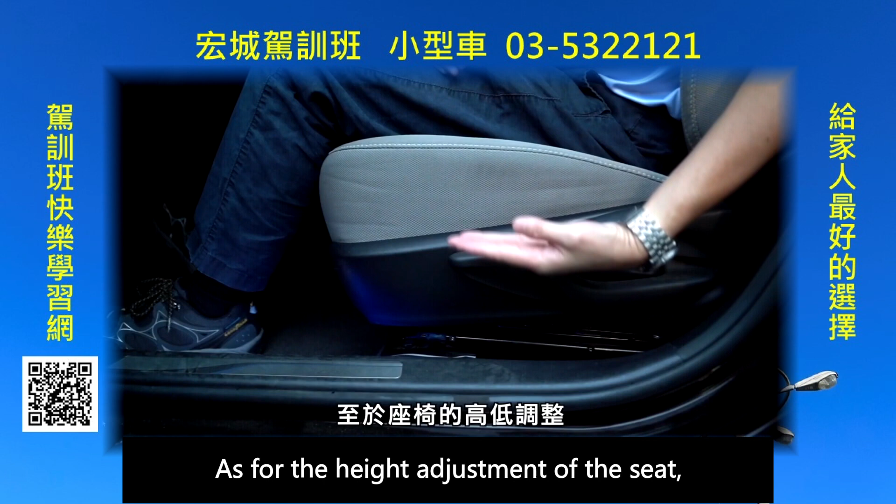When the driver's seat is too close and the airbag inflates, it can cause serious injuries. It is recommended to sit at least 25 centimeters away from the airbag. The distance is measured from the center of the steering wheel to your sternum. Additionally, the closer the headrest is, the better head protection you will have. Therefore, it's not advisable to use a cushion on the seat back.

Teacher, I would like to ask how to adjust the rearview mirror. Not adjusting the rearview mirror before driving will prevent a complete understanding of the vehicles on both sides and behind. When turning or changing lanes, it can easily lead to misjudgments regarding the presence of other vehicles, causing traffic accidents. Furthermore, the cleanliness of the mirrors should also be noted. The interior rearview mirror should primarily provide a view directly behind. It is recommended that in adjusting the side rearview mirrors, 1/5 of the inner circular part of the mirror should show your vehicle. The remaining part should show what is behind the vehicle and the status on the side of the vehicle.

Teacher, I have one last question. How should the steering wheel be adjusted? If the steering wheel is not properly adjusted, it will affect our steering maneuverability and can create ergonomically incorrect movements, leading to hand, back, and shoulder soreness. This is not good for long-distance driving. When adjusting the steering wheel, the manual adjustment lever is mostly located under the steering column. If the vehicle's steering wheel supports height adjustment, after adjusting the height, try turning the steering wheel. While turning, the principle is to keep your hands from touching your thighs. Also pay attention to the information on the dashboard and make sure the steering wheel does not obstruct it. Is everything clear? I understand. Thank you for the detailed answer, teacher. If you want to know more about traffic safety information, please visit the traffic safety website.

After watching the video, let's move on to our course: understanding vehicle structure, driver's cabin, and dashboard.

Each type of vehicle's dashboard is generally similar. However, the more warning lights there are on the dashboard, the more testing systems it will have. The color distinctions generally include blue, green, yellow, and then red. Generally speaking, the red part means you need to address it immediately. The yellow part can usually wait to be addressed. Green indicates normal; you probably don't need to deal with it right away. There are about these colors.

Let's take a look. The remote control part is the remote control on your body. As long as you get close to the car door, that door handle can open the car door. Its design is the door handle. It has a sensor, it can detect you. If the remote is on you, the car door can be opened, and if you touch it again, it will close the car door. You can also use the button.

There are buttons on the remote, and it has a key on it. Why is there a key? Because it's worried the remote might be out of battery. You can use this key to open the car door.

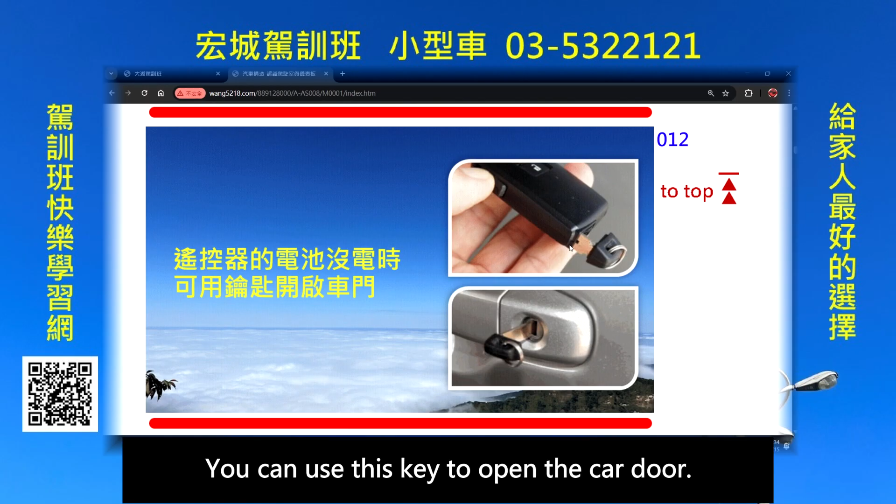But if your remote is completely out of battery, you still can't start the vehicle. You just need to change the battery. According to the coach's experience with this car, it's a new car, so after about 4 years the battery will run out. After changing it, the new battery ran out after 2 years.

Just sharing this with everyone. Changing the battery isn't too expensive. The first time I changed it, it was $60. This time it's going to be $80.

The remote battery can drain due to weather factors, and then you can't open the car door. This is a situation I encountered in the mountains. I woke up in the morning and the remote couldn't open the car door, because it was too cold the night before. After the weather warms up, you can open the car door again. This is to let everyone know: in this situation, after you go down the mountain, you should change the battery, because it has already lost a lot of power.

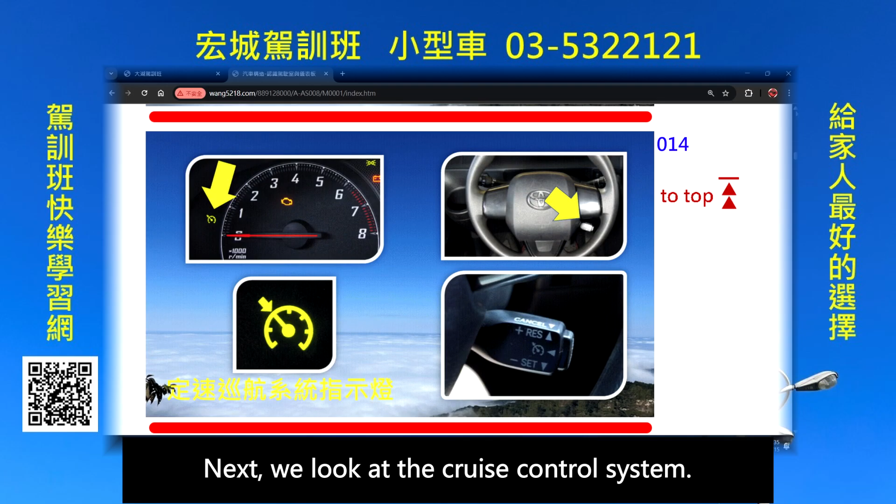Next, let's look at the cruise control system. This car has a cruise control indicator light. Everyone driving on the highway, what do you fear the most? Speeding. Imagine if there is this system - you set it at 100, and it maintains that speed. It won't overspeed, isn't that great?

Generally, they set this system for driving. If there is a situation...

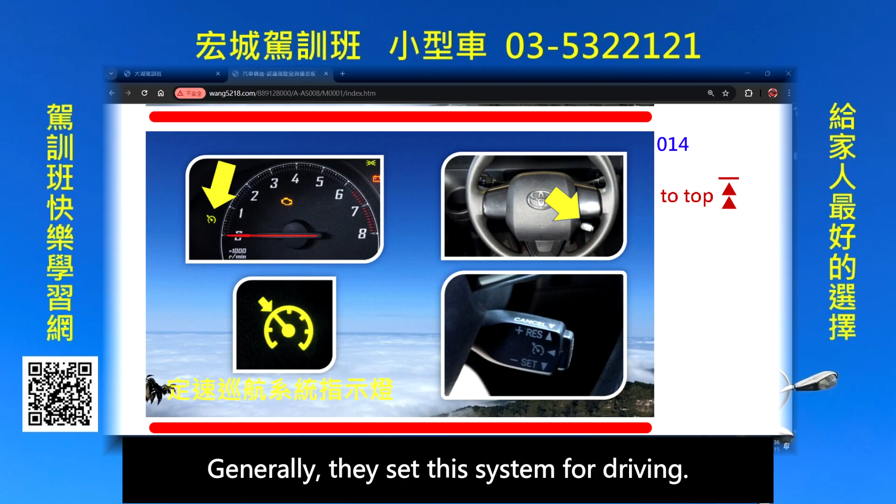There's another question I want to ask you, students. When you set it to maintain a fixed speed, where does your right foot go? Usually it retreats. What happens if the right foot retreats? If something happens and you need to brake, you have to choose between the accelerator and brake - what if you hit the wrong pedal? Does that lead to a crash?

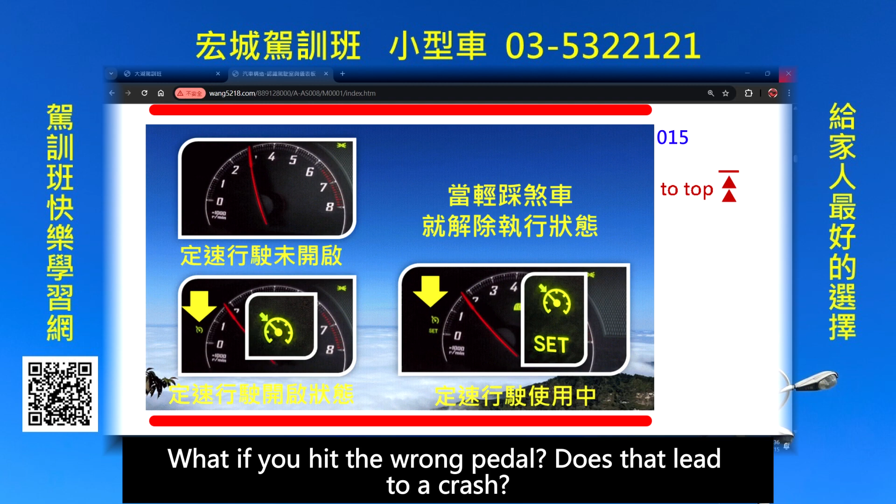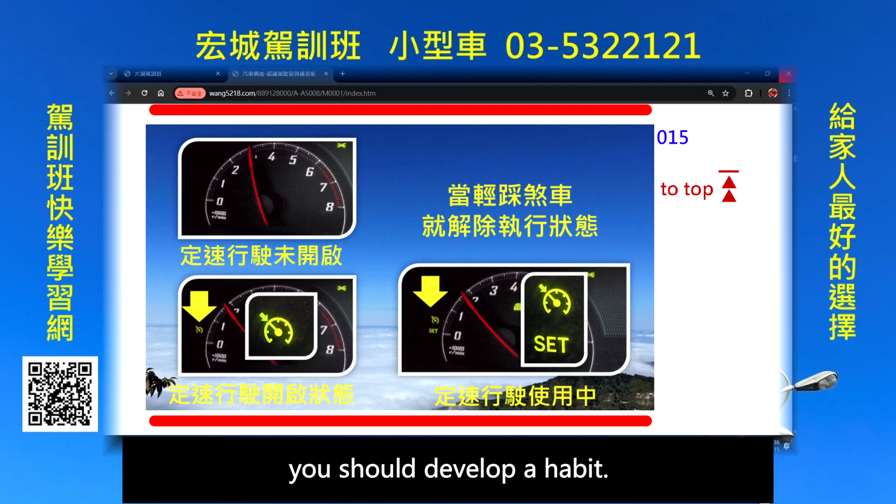So I want to remind all students of something - you should develop a habit. Keep your right foot off the pedal; it should rest on the brake pedal, ready to brake. I'll say it again: when you drive, you should develop a habit. Keep your right foot off the pedal, it should rest on the brake pedal, ready to brake, not pulling back.

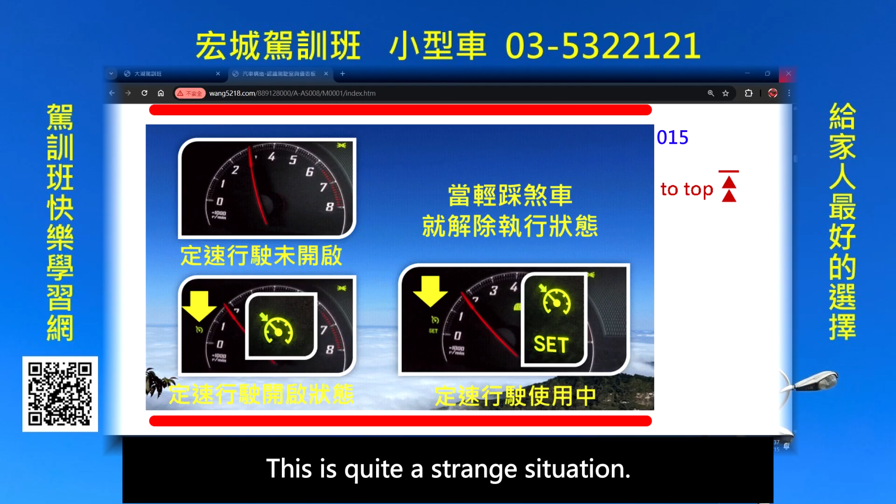Next, new cars all have tire pressure monitors. The tire pressure monitor has been discussed before about tires, let's briefly mention it here as well. When the light comes on, it means one of the 4 tires has insufficient pressure. As previously mentioned, it lights up when it's about 5 psi low.

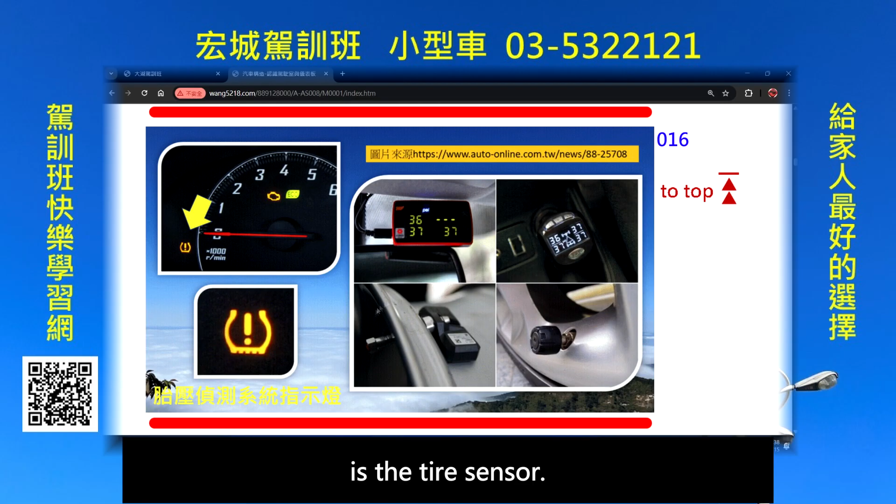Its design typically has 3 types. One type is installed inside the rim, another type is installed on the outside of the rim, and the other is the tire sensor which detects differences in tire rotation speed. The type outside the steel ring is the tire sensor - it senses the difference in tire rotation speeds.

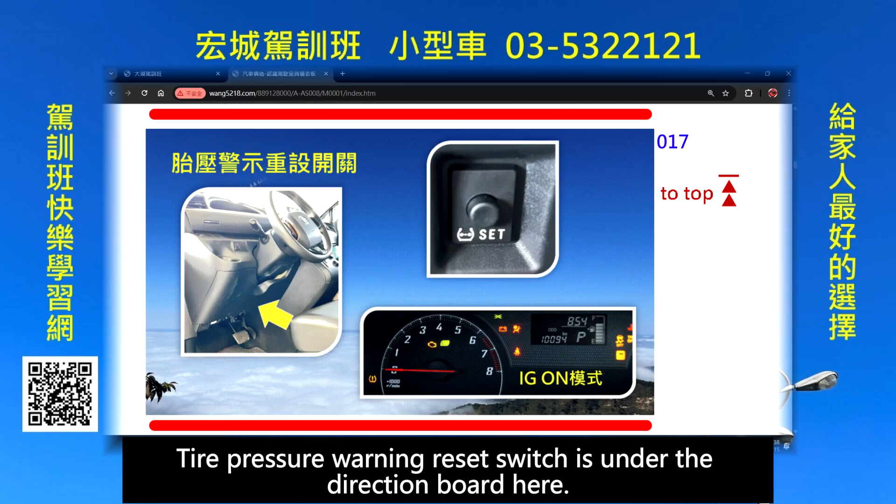He just indicates there's a switch here - the tire pressure warning reset switch is under the direction board here. If we're using the stick, let's not touch it. This is the explanation from the user manual - this part will be handled by the manufacturer, let's not mess with it.

For tire pressure on our car, look at the A pillar and the B pillar. The B pillar has a sticker here, and the sticker will tell you the size of the original manufacturer's tires, and also the tire pressure that needs to be filled - how many pounds. As for the tire pressure gauge, we usually don't have one at home.

Where can you find a tire gauge? At maintenance shops, tire shops, and also gas stations - they have free water and air refill. Where is this? At the gas station in the rest area. It also has a place for you to inflate tires, and also a free water refill place. This is the inflating equipment.

In the future, when you drive in mainland China, what do you do when you find there's no air? To be precise, it's not about finding there's no air - you should regularly check the tire pressure. Maintenance shops, gas stations, and car rental places all have inflating equipment. Or you can buy an electric inflating device for your car. My family bought one a while back, and it's kept in the car.

It's rarely used since it can inflate. It has a warning light and can also serve as a flashlight. It's great, right? But if left unused for a long time, it might break, especially electronic products. So you should learn in advance.

Before you buy something, consider carefully. Is your usage rate high? Not to say don't buy it, it depends on your usage rate.

Let's take a look at the gas station inflating equipment inside the rest area. This is its structure, this is the valve. When we're measuring tire pressure, we just press down on the valve. It will detect the pressure.

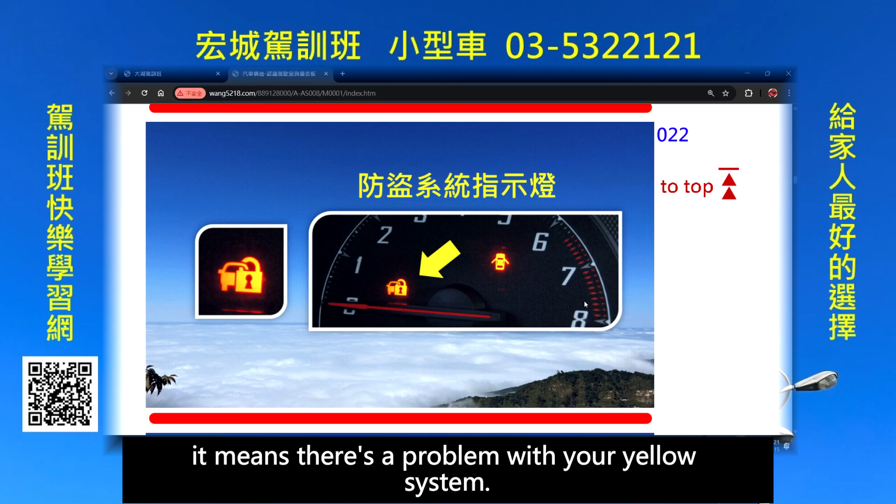Next, let's see if this light is red. The anti-theft system indicator light, when this light is on, it means there's a problem with your anti-theft system. Similarly, you should check it regularly.

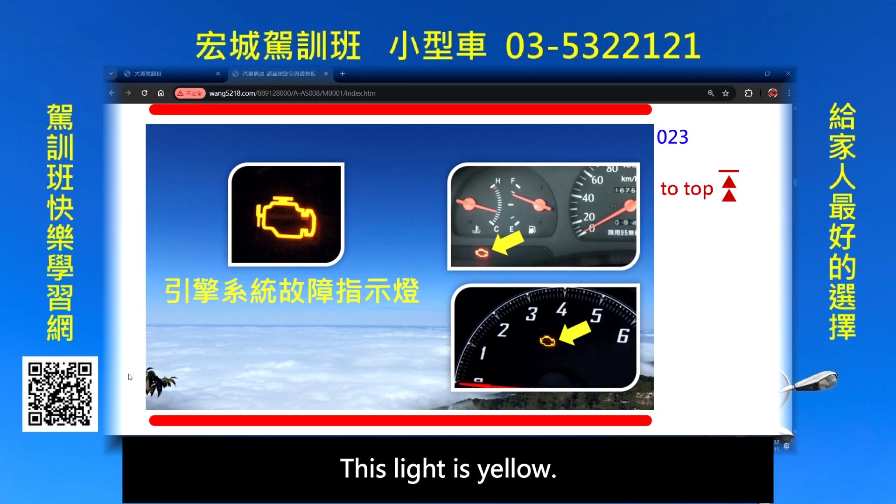Engine system fault indicator light. This light is yellow, it means you don't need to handle it immediately. It's okay to delay, because this needs to be checked with a computer. There might be issues with that system, or it could be a computer malfunction, or other sensors might have problems. All these possibilities, ultimately you still need to go for a computer check to troubleshoot.

When the energy-saving driving indicator light is on, it tells you that you're currently in energy-saving mode. If you slightly press the accelerator, this light will turn off, which indicates that you're in fuel-consuming mode. Not every car manufacturer has this light, it depends on the brand.

Door open indicator light. If this light is on, it usually accompanies a buzzer sound. There will be other sounds telling you that the car door is not closed properly. Therefore, when checking, you need to check each door, including the rear trunk as well.

This is the red light, the small light indicator. If this is on, it means your parking lights are on. If this is on, it means your low beam is on. Then turn it again to the headlights.

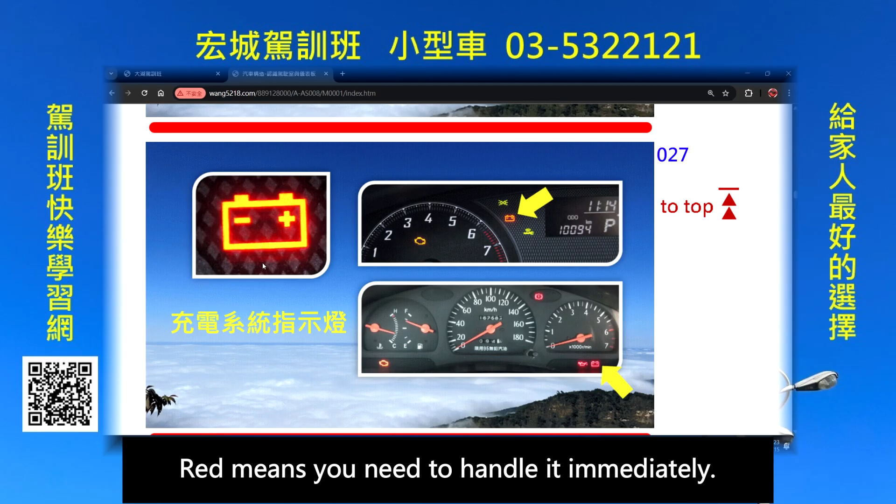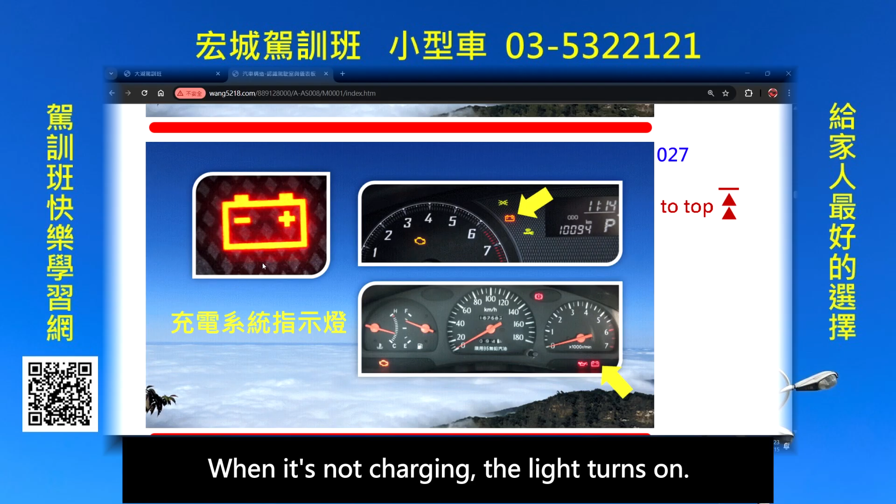Charging indicator light. If this light is on, it's red. Red means you need to handle it immediately, otherwise you'll run out. The charging indicator light means our car has an electric generator, and the generator isn't generating power. When it's not charging, the light turns on, and the car can stall. Because the battery still has some power left, it can supply power for ignition, until it runs out and the battery is empty. Then it's useless.

Airbag protection system and seatbelt pre-tension warning light. After you start the engine, if this light comes on, you need to get it checked. Your airbag system and seatbelt pre-tension system, because there are front airbags and side airbags, must return to the dealer to check the door switch system.

Engine touch start system indicator light. When you start the engine, a green light will appear if it detects your key, and you can smoothly start your engine. If you press the start button and it shows an orange light, that means it hasn't detected your key, or your key's battery is dead. It still won't start, and this orange light will appear.

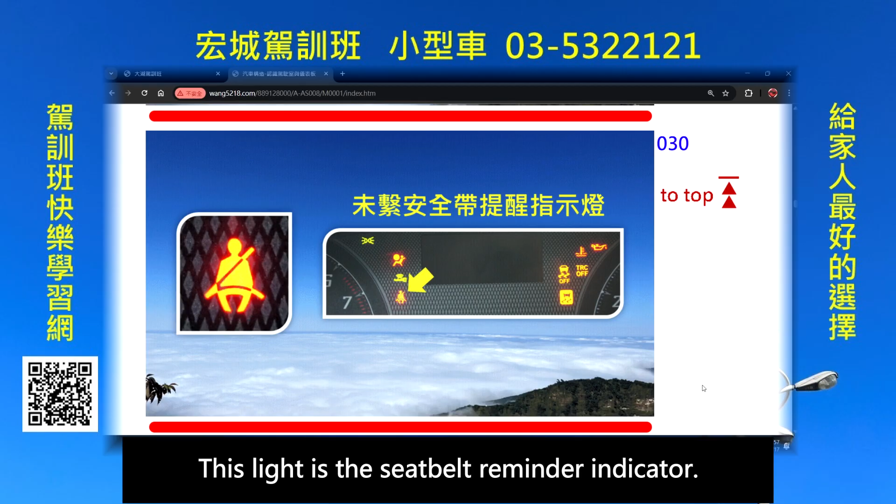This light is the seatbelt reminder indicator. When you haven't buckled your seatbelt, this light is on. Next, it will sound an alarm.

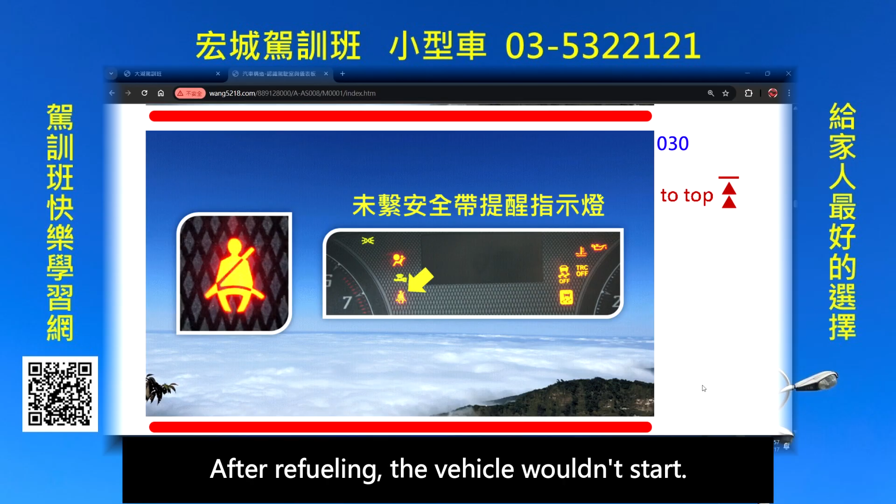I once met a gentleman who drove to a gas station to refuel. After refueling, the vehicle wouldn't start. After several attempts, he found out it was because he hadn't buckled his seatbelt and couldn't start the engine.

High beam is just a light. Our traffic regulations tell us 100 meters ahead, if there are no cars, you can use high beam. But at night, how do you know? It actually isn't too difficult, as long as there are no cars in front, whether they're going the same direction or opposite, no cars, then you can use high beam.

Why use high beam? Because high beam casts a higher angle, you can see further, and seeing further allows you to avoid danger. In the future, when we drive outside, when passing an intersection, also pay attention and switch to low beam. When we are on the road, also pay attention to this, using high beam while driving can blind oncoming vehicles so they can't see the road ahead. So I want to remind everyone to learn and pay attention to the light indicator.

Next, let's look at the low oil pressure warning light. When this light is on, the same applies.

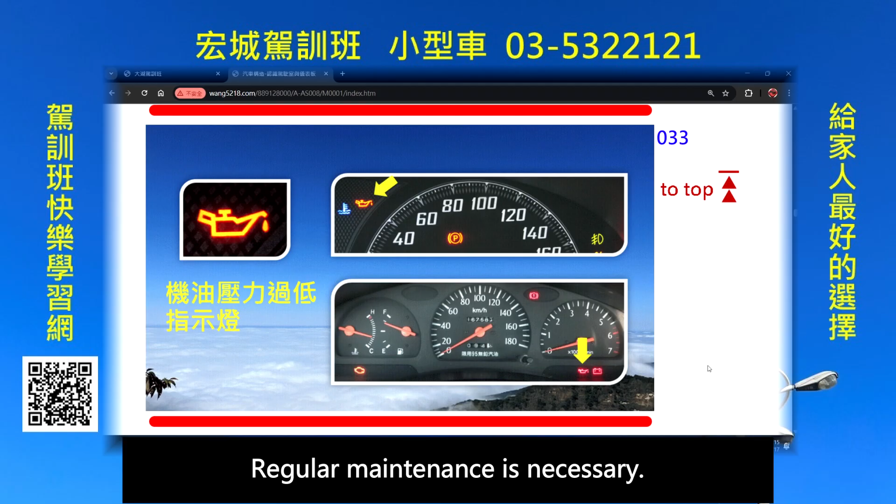Regular maintenance is necessary because if the oil is insufficient, the temperature will rise and parts will wear out. What is warming up the engine, and why do we need to warm it up?

Let's take a look at this news report, preparing to take the beloved car for a stroll.

Many people often just wait after starting, simply standing still. This car looks like an old model, but actually it's a 90s car, about a car from 1989 or earlier. This model has a carburetor, so as I mentioned, it needs warming up.

The key is to see when the water temperature reaches normal temperature. Now it's just warming up, and it will reach the normal temperature level. The condition of the car's fuel lines will be better because it reaches operating temperature. The owner says you must wait for the engine to run smoothly before driving.

allowing the engine's air and fuel to mix. But its fuel supply accuracy can lead to air pollution. Today's car models have long been replaced with computer controls. No need to warm up, partly to avoid pollution. On the other hand, the new car's computer is very smart. It sets everything up for you in real time.

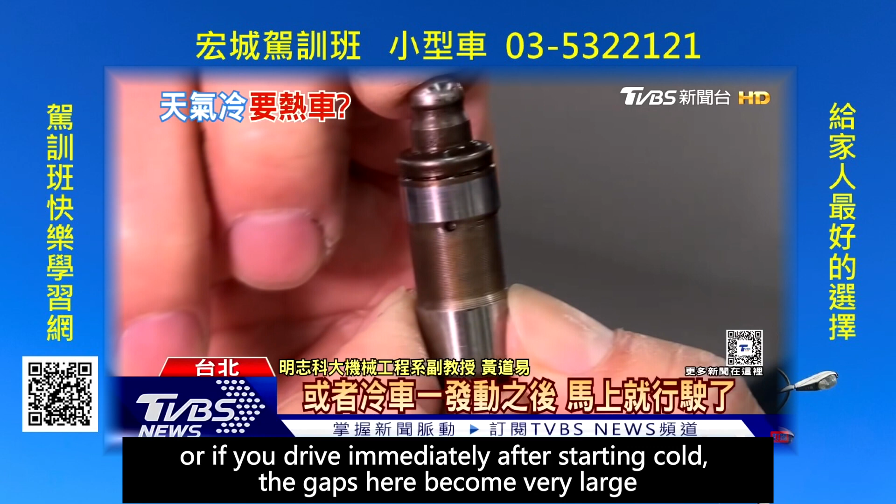The entire operation will produce a much louder sound. So at this time, fuel consumption will be very poor, and it will generate more exhaust emissions.

The car's parts are all metal. Each part will wear out from mutual friction when operating. Over time, it will certainly be prone to failure, especially when the engine is cold. The oil flows back down and relies on the startup to pump back into the engine, so oil truly controls the lifeblood of the car.

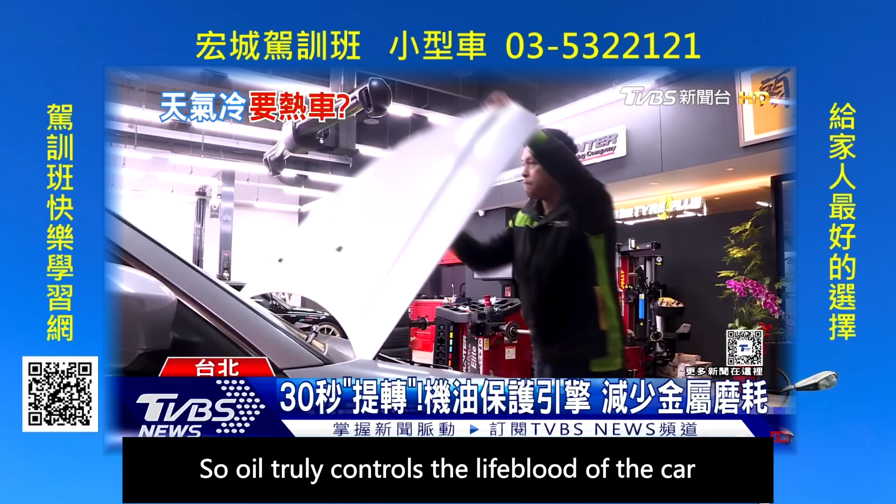If a driver forgets maintenance and only maintains after 20,000 kilometers, the oil is already gone. Actually, you can still drive, but if you want the car to last and keep it longer, maintaining it regularly is essential.

If you maintain your engine well, there are many cases abroad reaching 1 million kilometers, and the engine is still fine. If you're not diligent with maintenance, some people only make it to 70 or 80,000, or over 100,000, and the engine fails. Whether you maintain every 5,000 kilometers, or change the oil at 10,000 kilometers, both are fine. It just depends on the owner, whether you want to do one major repair, or change oil frequently to properly maintain your beloved car.

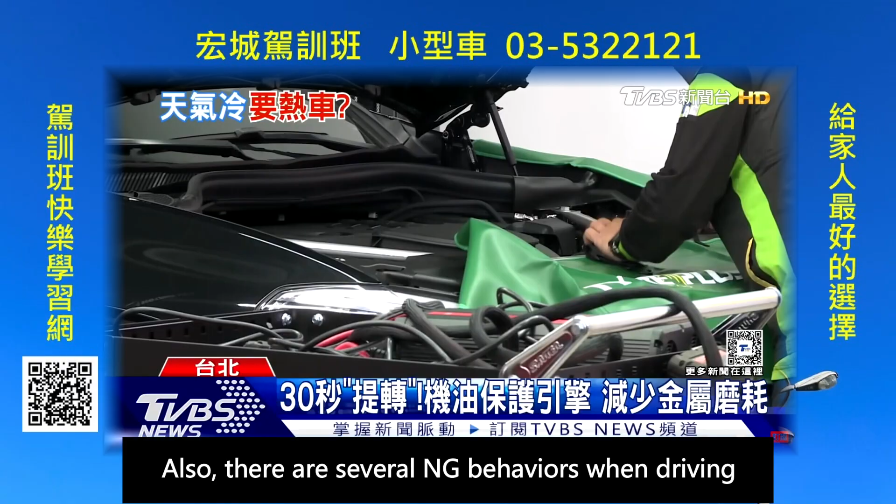Also, there are several NG behaviors when driving. Don't idle too long, as it easily causes carbon buildup or gets exposed to sun or rain, which also makes the rubber seals prone to cracking. Heavy acceleration, hard braking, and opening windows at high speeds all waste fuel and damage the car.

If you want to avoid frequent repairs for your car and keep your wallet safe, remember these points. After watching the previous video, the purpose of warming up is like stretching before swimming, to prepare beforehand.

It's actually the same principle. This car has a blue light, called the low engine coolant temperature indicator. When you just start the car, the light is on, telling you the engine is currently in a low state. You need to warm it up a bit. Wait for this light to go out before you can step on the gas and drive off.

Now let's take a look and observe when it just started, whether its engine RPM increased. Observe it when it just starts moving. If its engine RPM gauge increases, and then the light went out, did the engine RPM decrease?

Okay, there's a countdown here. I see there's a countdown. 5 seconds. Now the engine RPM has increased. It has increased, but the light is still on. Let's take a look at when the light went out. How many seconds in total? Did the engine RPM drop? It is currently at 1100 RPM.

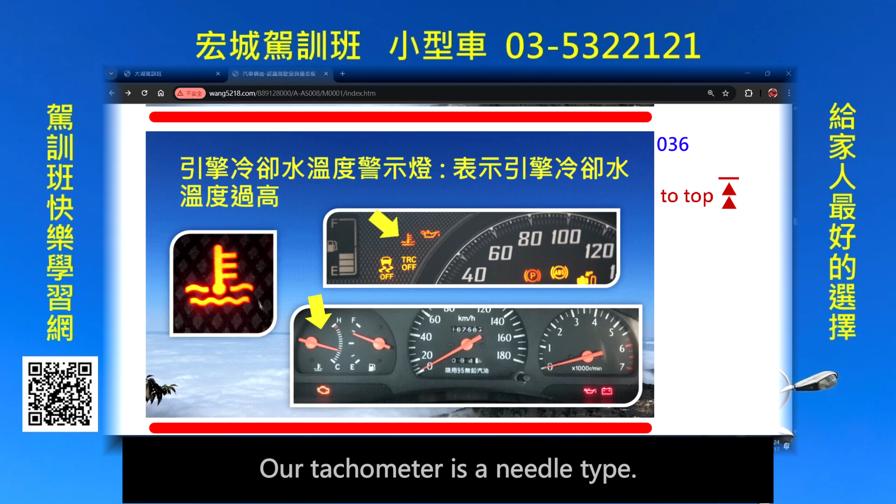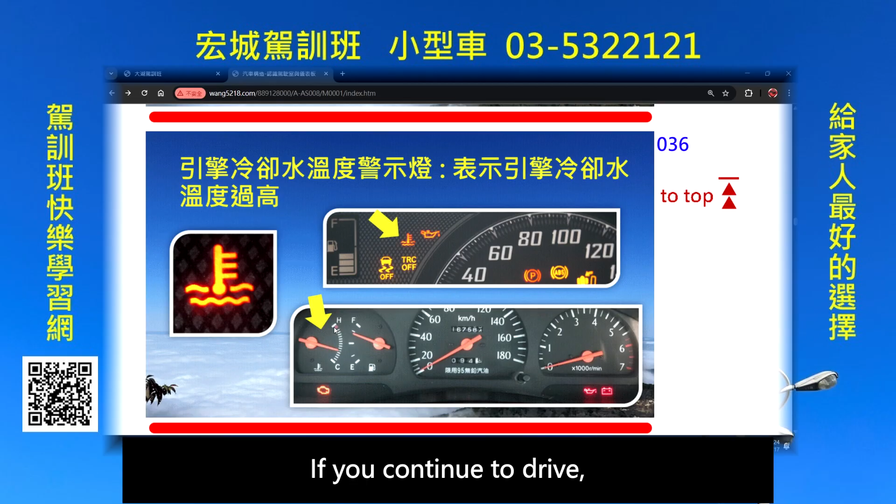Our temperature gauge is a needle type. Generally speaking, it's normal for the needle. If it rises, likewise, you need to stop by the roadside to rest. Get a coach to handle it. If we drive outside, it's the same. Pull over, don't keep driving. If you continue to drive, the engine can easily get worse.

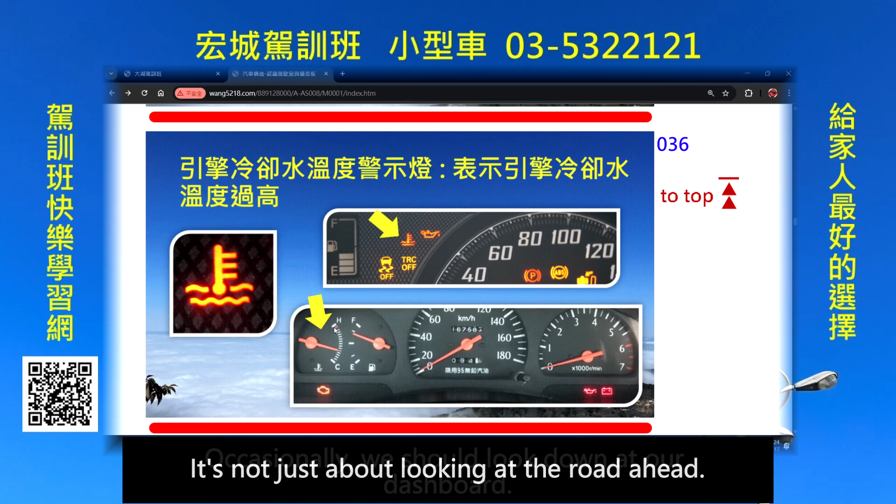Originally, it's just overheating if you ignore it. Eventually, it will stall. If it's been fixed, what does it mean? It could mean the same as mentioned earlier. Therefore, when we drive, we need to be very clear about the dashboard lights. It's not just about looking at the road ahead. Occasionally, we should look down at our dashboard.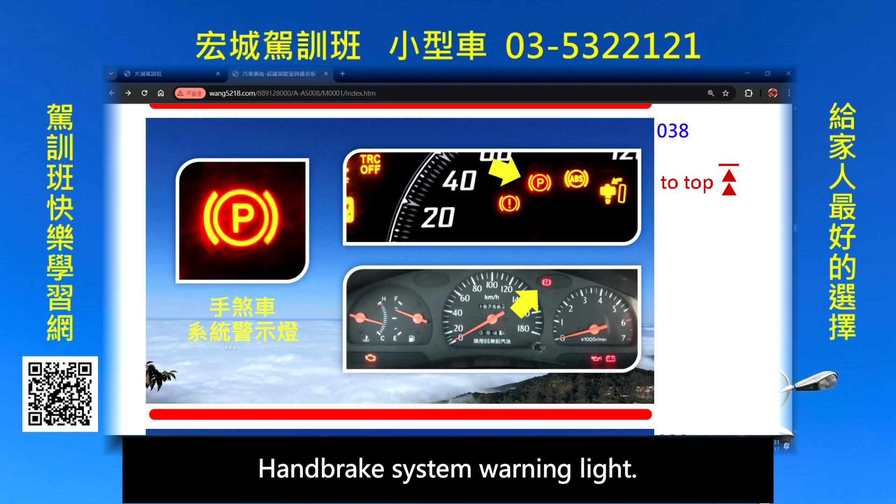Handbrake system warning light. This means if you haven't released it, it will light up. If the handbrake is pulled tight, will the car be able to move?. The answer is it can move. Why? Because we have front-wheel drive. The back tires don't move. Only 2 points of support are left. The area of the 2 points of support is about the size of 2 small coins. So if your handbrake isn't released, the car can still move.

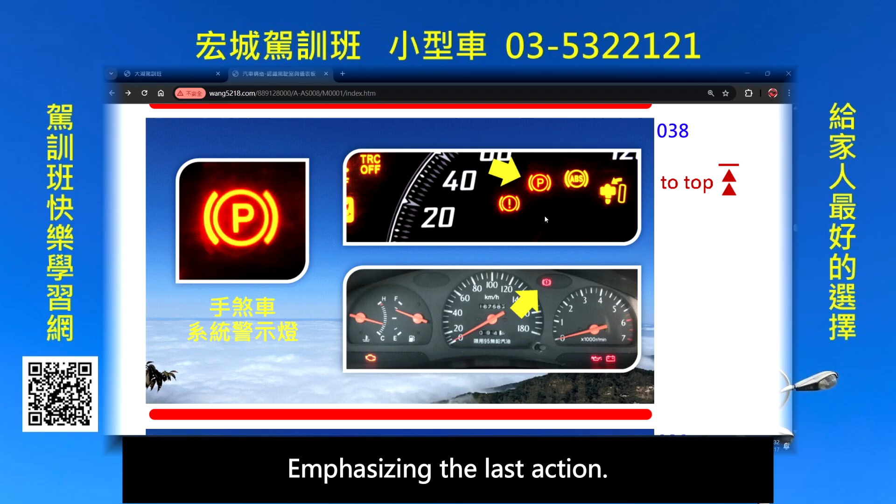However, your brake pads might get worn out. The tires will also wear out. Therefore, when we check the vehicle, the last action is to release the handbrake, emphasizing the last action. Release the handbrake. This is to confirm it has been released. So everyone, in the future, when driving, develop this habit.

Next, let's understand the Hill Start Assist control system. What is its operating situation?

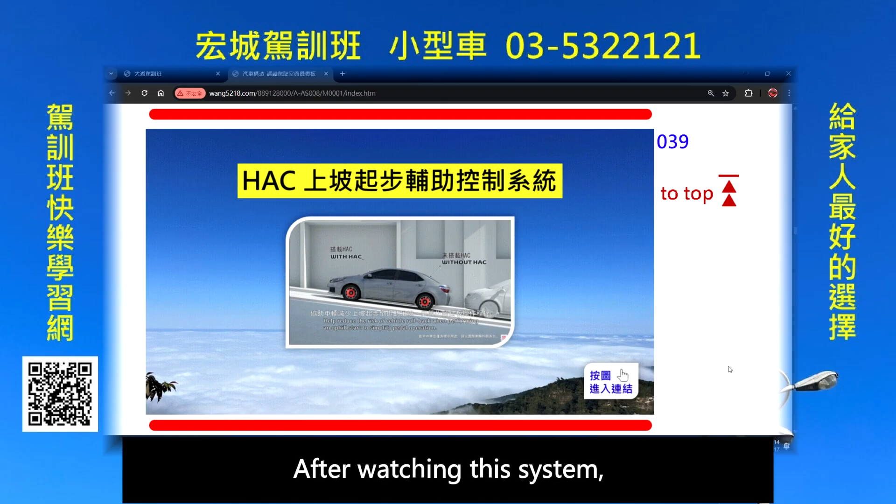After watching this system, dear students, when practicing driving, if you have this system, you won't need to use the handbrake for hill starts. After removing your foot from the brake pedal, it will hold your vehicle in place. Then, as you move your foot, the vehicle won't roll back. Then, when you accelerate, you can go straight up.

However, the coach wants to remind everyone of one thing. The hold time is not continuous. It will last about 2 to 3 seconds, giving you enough time to move your foot to the accelerator. Accelerate and go up. It doesn't mean that if you release the brake, you won't slide. You still will slide. It just pauses for about 2 to 3 seconds.

From this video, we can see one thing now. We have many parking lots in Taiwan, parking towers. The car in front is on the slope. Let's not go up yet. Because our car has this system, we won't be sliding. But that doesn't mean the car in front has the same system. We've seen reports on the news too. Suddenly reversing, the car behind can't stop in time and crashes.

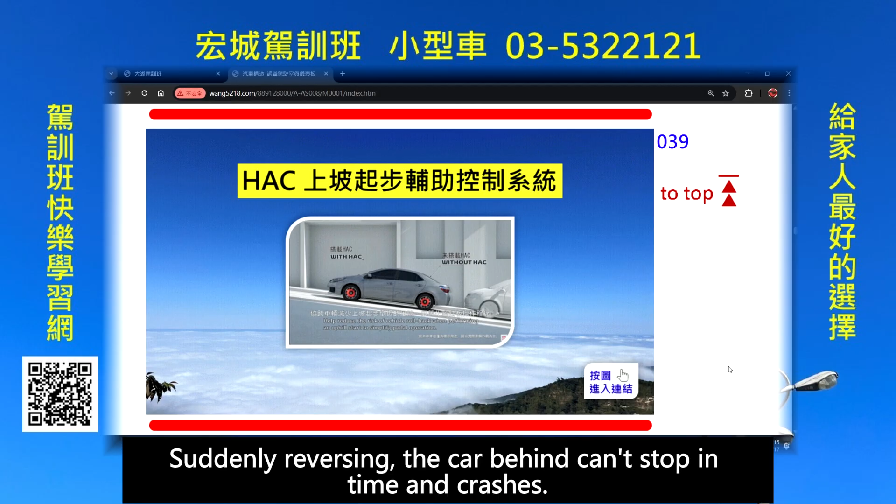So whose fault is it? Don't follow so closely, you're too close to the car in front. You're not keeping a safe distance. Here you also need to choose in advance. No matter when you're driving, you must maintain a safe distance and space.

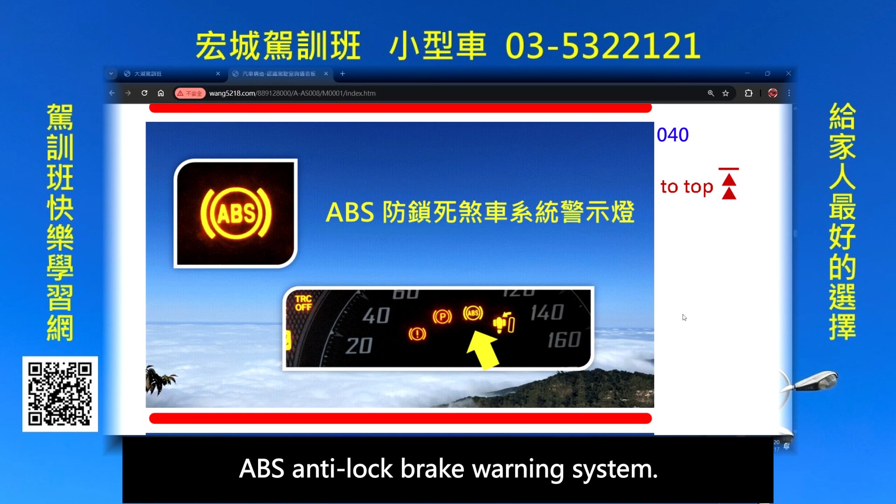ABS anti-lock brake warning system. It keeps the tires from locking up, because when we hit the brakes, if the tires lock up, the car will roll and lose control. This system uses a computer to control our brake hydraulic pressure. It enables pulsing brakes. Let's take a look at its operating mode.

After watching the video on the ABS anti-lock brake system, this system has become standard equipment. Currently, all vehicles are equipped with this system. This system helps us apply brakes when speed is high. Based on the animation we just saw, when he hits the brakes hard, it helps with pulsing brakes.

It can adjust the steering wheel to avoid danger, because if the tires lock up, you won't be able to steer. If it applies pulsing brakes, your car can easily steer. So a reminder to everyone: when we're driving fast, you shouldn't turn the steering wheel too much. Being too aggressive can also lead to losing control.

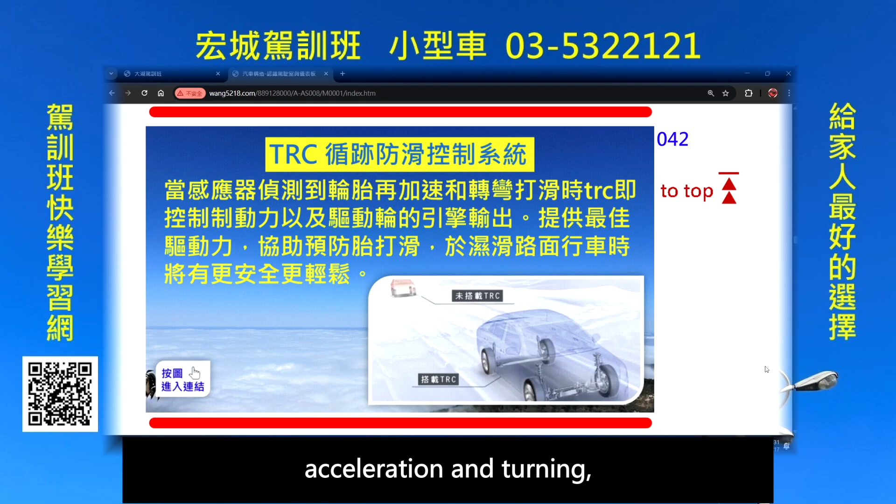When sensors detect tire acceleration and turning, if slipping occurs, this system controls the engine output to the drive wheels. It slows down the speed, providing optimal traction, assisting in preventing tire slipping. Driving on slippery surfaces becomes safer and easier.

Now let's look at the animation of this system. It means when starting on a slippery surface and accelerating, tire slipping may occur. We'll see the comparison with and without the system.

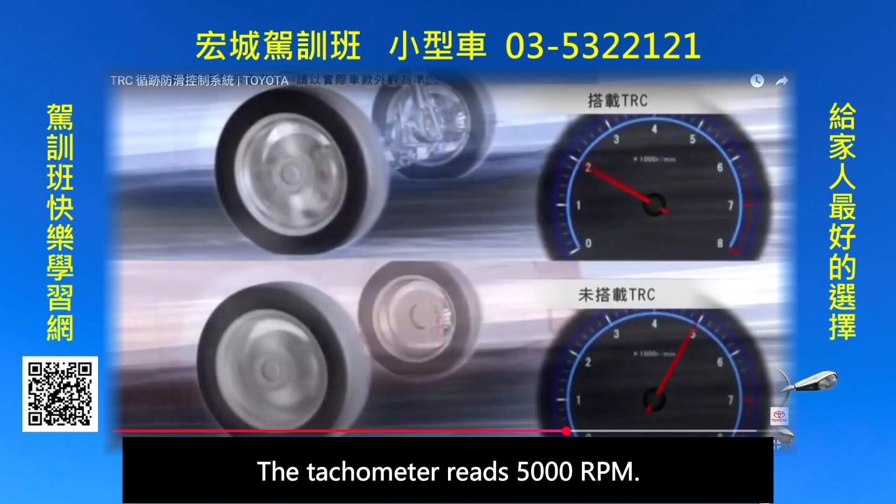We'll stop and look. Below is the non-equipped model, look at its engine - the tachometer reads 5,000 RPM. Above is the equipped model, it stays controlled at 2,000 RPM.

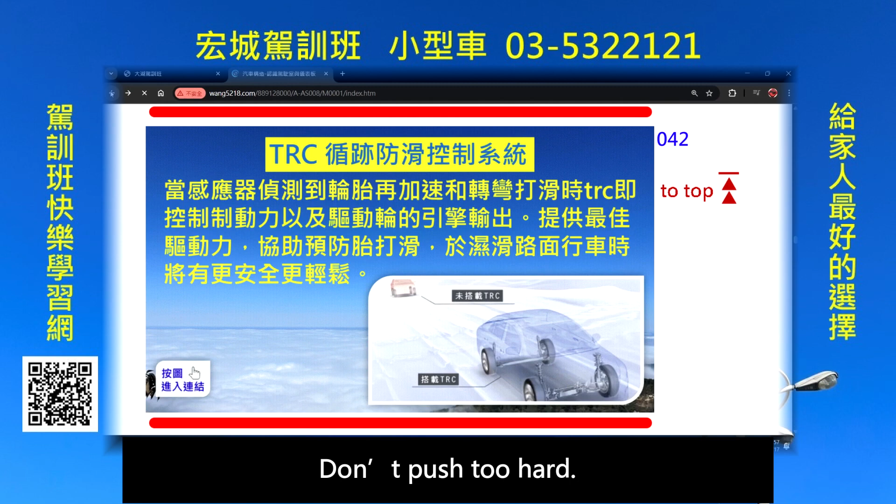So students, when you're slowly accelerating, pay special attention to throttle control. You need to learn to manage the gas - press gently, don't push too hard. If you push too hard, it easily leads to slipping and losing control.

There's an indicator light here, it can be turned off - the traction control system indicator light. Let's see how it operates. There needs to be a warning light. It says if this happens...

Stuck in mud or snow, this system can reduce engine RPM and transfer power to the wheels. Pressing the button can deactivate the system, making it easier for the vehicle to get unstuck. In other words, this system can be activated or deactivated.

Next, let's look at the vehicle stability control system. It also discusses this here, or in off state. Next, let's look at the vehicle stability control system, it also talks about this here.

When encountering oversteer, this system will help us brake, help us slow down, control the engine power output, and avoid the vehicle spinning out. If there is understeer, this system can also assist with braking, reduce the engine power output, and keep the vehicle on a normal driving path. It can control braking and engine power to ensure stable driving.

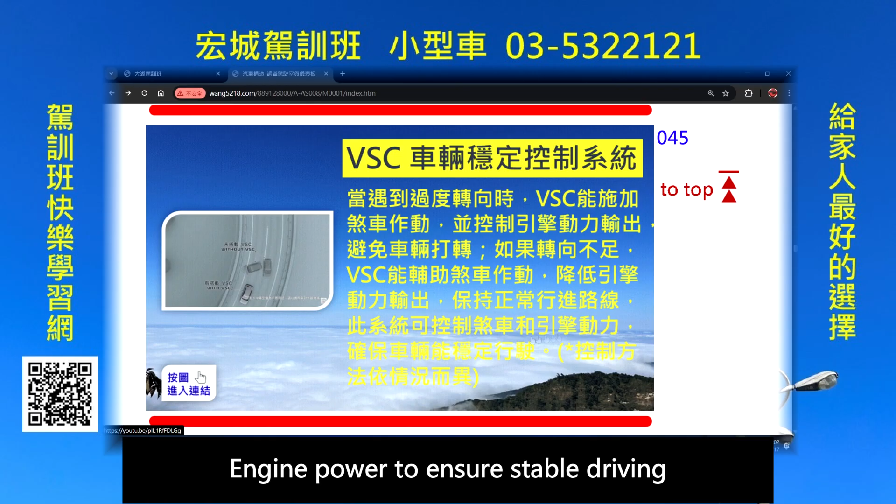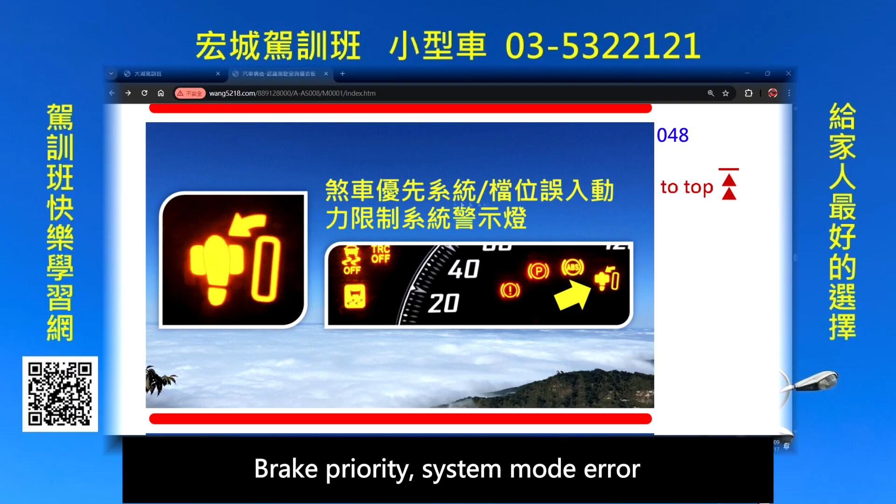Let's take a look at how this system operates. It means to say, when this system is in operation, this indicator light will flash. Brake priority system mode error, power limitation system indicator, electric power steering system warning light.

When this light comes on, your power steering wheel electric motor part will fail to function. At this time, your steering wheel will feel very heavy, but it can still be turned.

You can still turn on the front fog lights. If there are front fog lights, it implies there are rear fog lights. This one is for thick fog lights. Did you see the thick fog lights? This is to remind everyone, choose to use fog lights when foggy, for front and rear fog lights.

Police agencies will not actively stop to check, however the public can report you if you are not. In fog, you cannot use fog lights without conditions - front fog lights and rear fog lights.

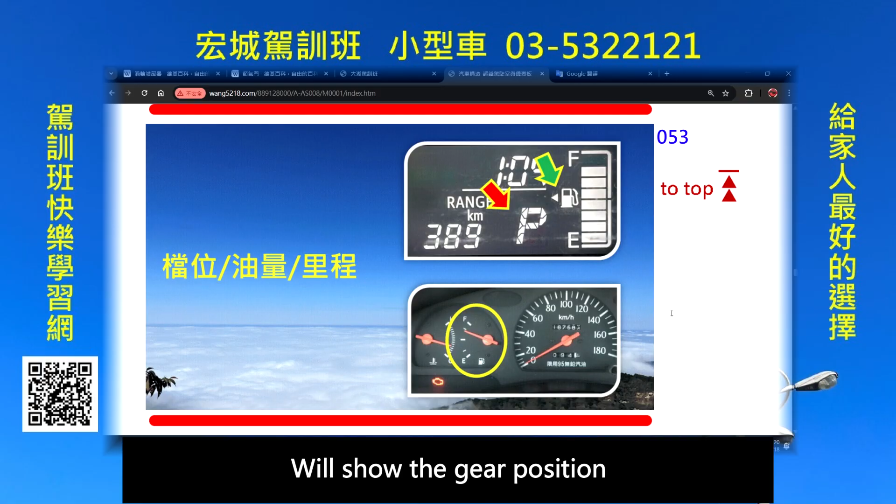The dashboard will show the gear position, fuel level, and mileage. There is also total mileage, and you can set the mileage from point A to point B. You can also find out how much fuel is left in your tank and how many kilometers you can drive.

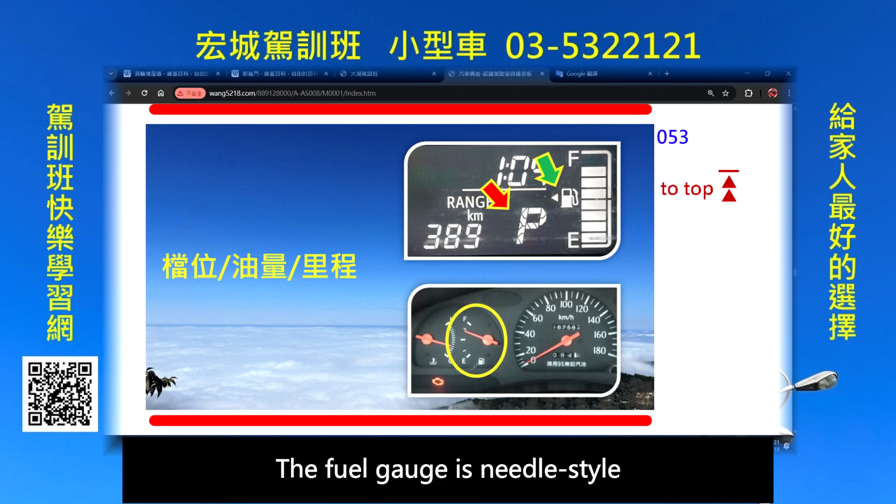Below that, this is traditional, just like our instruction vehicle. Generally, instructor vehicles use gasoline. The fuel gauge is needle style. There's also a temperature gauge, which is also needle style, and there's a small triangle beside it.

What does this triangle tell us? That our fuel filler is on the left side. If this small triangle is on our right, it indicates that this car's fuel filler is on the right.

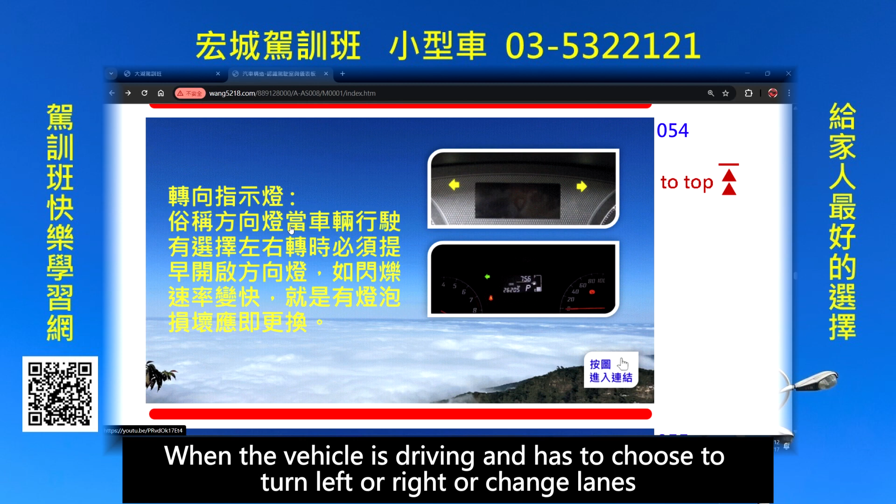The turn signal light, which we usually call a direction light. When the vehicle is driving and has to choose to turn left or right or change lanes, it must turn on the indicator light early. The turn signal should flash.

The speed becomes faster. On the other side, if we signal to the right and it flashes faster while the left side flashes normally, what does this mean? The bulb is burnt out and needs to be replaced immediately.

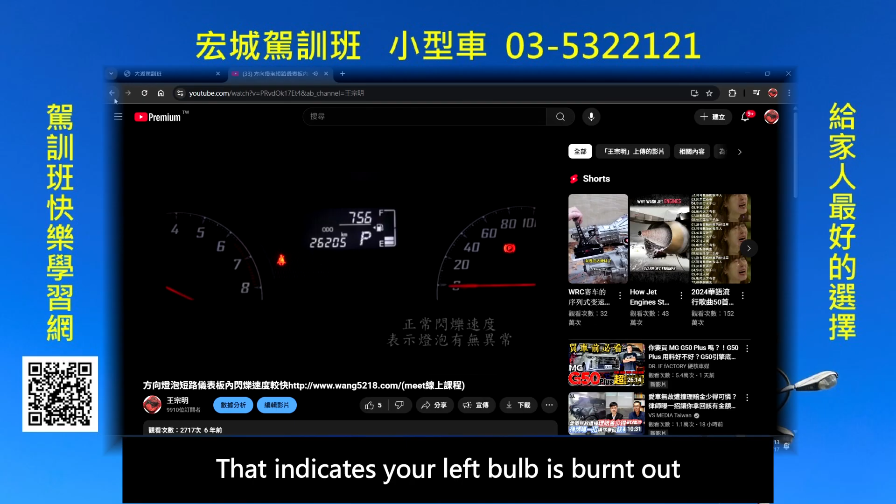A burnt-out bulb must be repaired, because when you change lanes, the car behind doesn't know. It's easy to have an accident.

The brightest lights, only this will display a burnt bulb, nothing else will. Your headlights being burnt out won't be shown as well. If your brake light is burnt out, it won't shine and it won't tell you either. Only the turn signals will remind you.

I think the car manufacturers put so much effort into designing many functions for the bulbs, but they won't design for the left headlight being burnt out. Also, if the left headlight has a problem or the right brake light is burnt out, it should display the right brake light. I think that would be better.

Otherwise, they have designed many functions for anything you can think of in today's cars. It's not that they can't do it, they definitely can, like the turn signal and the headlights. Why wasn't it done? It should be done in the future too.

How do you know if the engine is running? One, listen to the engine sound. Two, feel the car noise. Three, give it a little gas. Four, check the engine RPM gauge.

Check the speedometer. When listening to the engine sounds, you can't really hear it. The engine is very quiet. You can hardly hear anything.

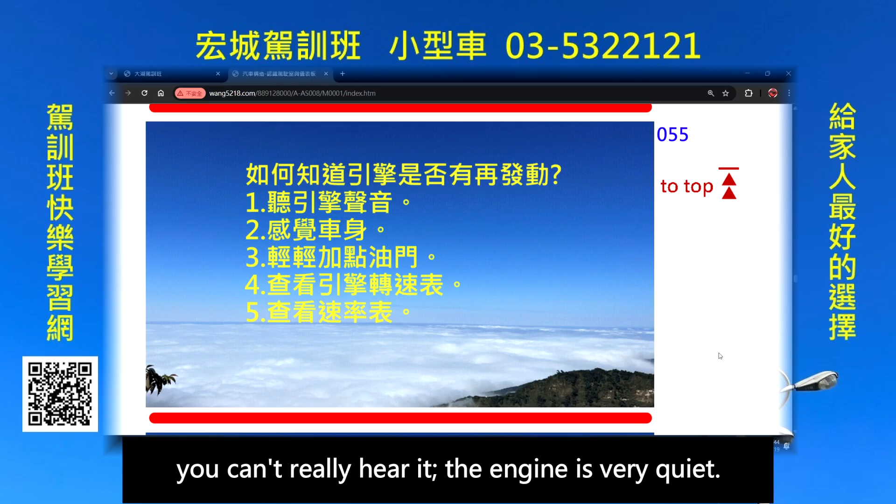Three, give it a little gas. If the engine is running, it will accelerate. If it's not running, you won't feel the acceleration. So this action is actually incorrect too.

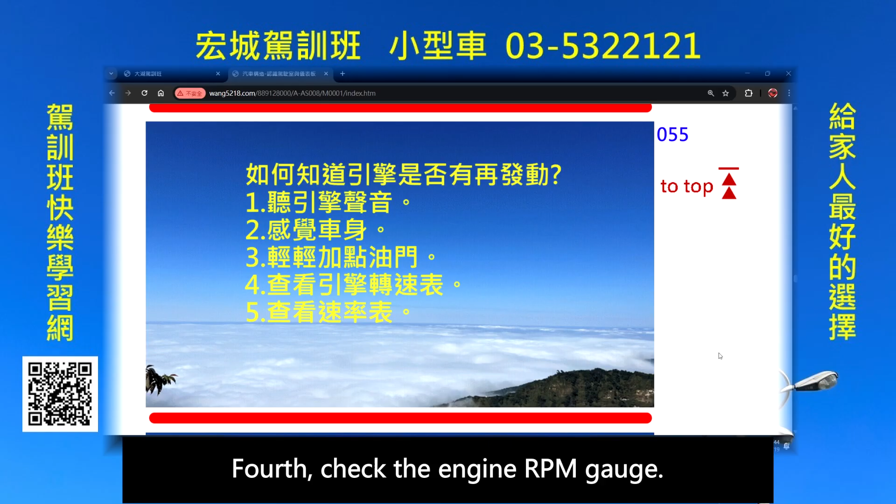Four, check the engine RPM gauge. We will look at it later. Five, check the speedometer. The vehicle is stopped over there, it's not moving, and the speedometer is at 0. So the final answer is the 4th item.

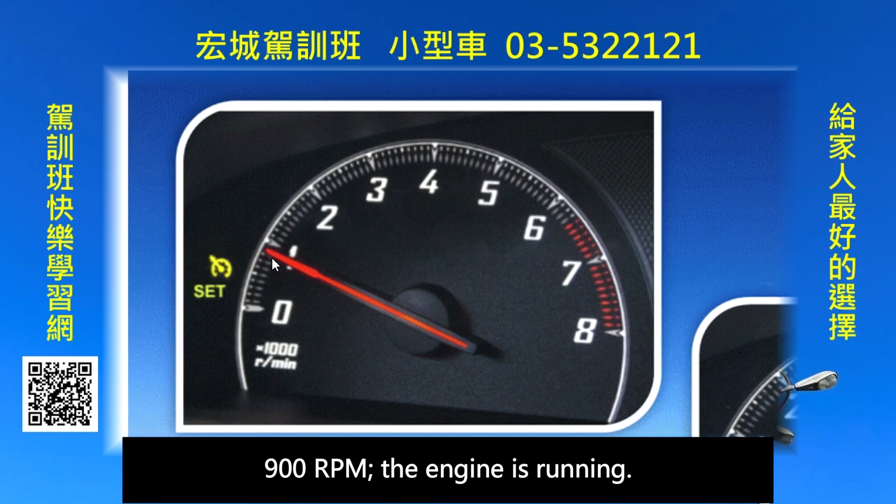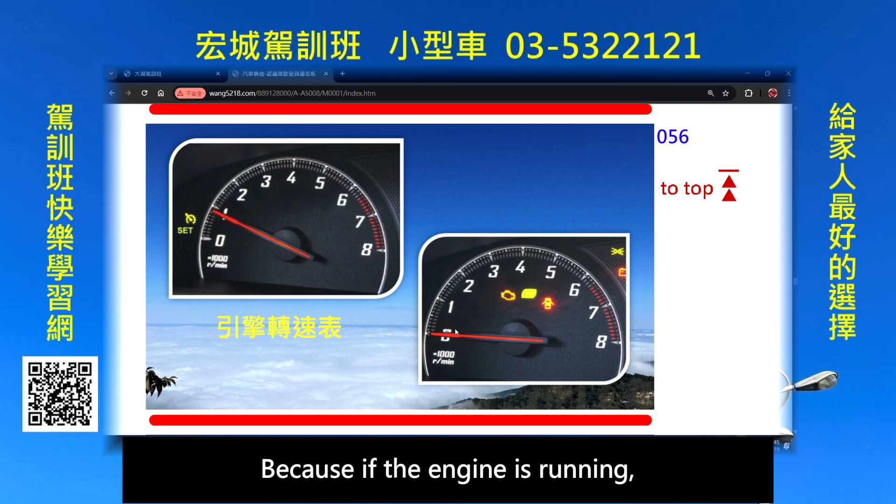The chart below shows 0 RPM. That's the state of having no RPM, it's off. Why observe this? Because if the engine is running when you try to start the vehicle, the starter motor can easily break. This is a reminder for everyone, so at the instant we start the vehicle, we must confirm the engine is running. The most accurate way is to check the RPM gauge.

Hazard warning light button. When do we use it? When the vehicle is on the road and you need to alert the vehicles behind you that we're slowing down, don't hit me.

You should press the hazard warning light button. This applies to heavy rain or fog too. Just the same, press the hazard light button.

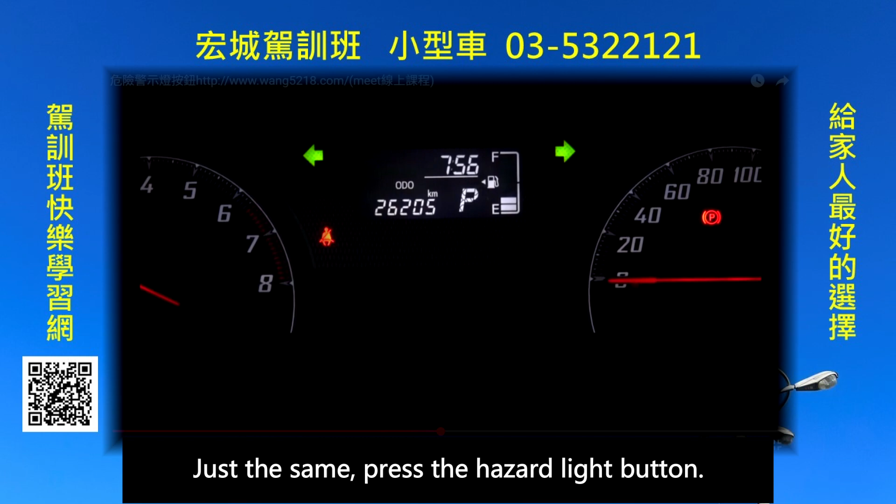After pressing it, remember to turn it off. Because if you don't turn it off, you will confuse others on the road. The cars behind won't know your intentions.

This is particularly important. When you park temporarily by the roadside, you should also press the hazard warning light button to alert the vehicles behind not to hit us, rather than using the turn signals.

Control lever. This is on the left side of our steering wheel. It can control our turn signals, and usually the lights are part of this control lever. Now let's see how it operates. All right, this is the low beam.

Next, switch to the high beam. This means the bright lights. Push forward for the high beams, and it switches back to the low beam.

This is the front fog light. Next is the rear fog light. All turned off, fog lights turned off. The lights are all off too.

If you tilt it up, it's the right turn signal. If you tilt it down, it's the left turn signal. When using the turn signals, don't use too much force, a gentle push will do.

Next, this is the high beam flash. You must know how to do this, because sometimes we need it while driving.

Turn on the hazard warning lights. All 4 corner lights will turn on. Remember to turn them off, because your turn signals won't work if activated.

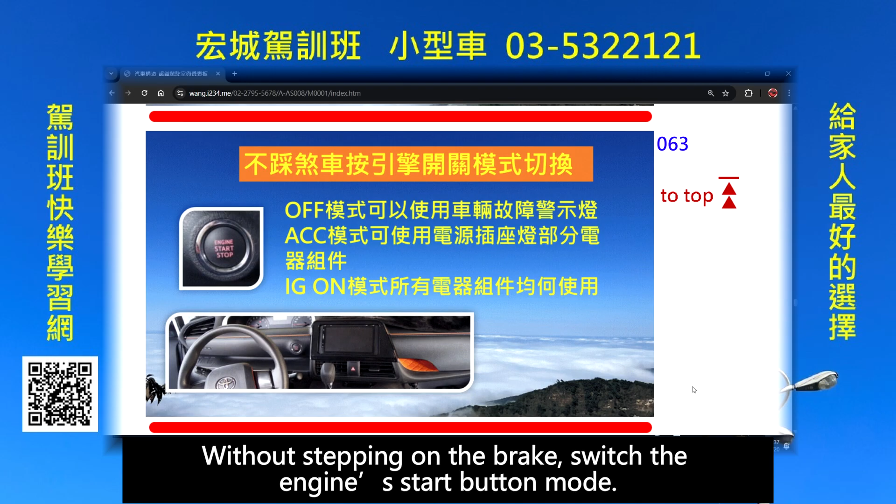The first mode is when our engine is off. You can use the vehicle's malfunction warning lights. Press once, and it activates the power outlet mode. Press once more, and it enters the mode where all electrical components can be used. Pressing again switches to the off mode.

Next, let's look at the traditional ignition mode, started with a key. For manual transmission, press the clutch to start. Step on the brake for automatic transmission. The shift must be in P or N gear.

The first section, turn on the electronics: audio system, switch to the second section, turn on the measurement system, power switch on the dashboard. All warning lights will illuminate. Enter the third phase, activate the starter.

After the engine starts, release your hand, the key will automatically retract. If it doesn't retract, it can damage the starting system. When turning off the engine, turn back, ignite, then push inward. Turning back allows you to remove the key.

For automatic transmission, there's a forced shifting button. Why does an automatic car need forced gear shifting? Because for an automatic car, when the vehicle is out of battery, the gear shift lever cannot move, so forced shifting is necessary, allowing the car to move out. So it has this design. The fuel tank opener is generally located beneath the driver's seat.

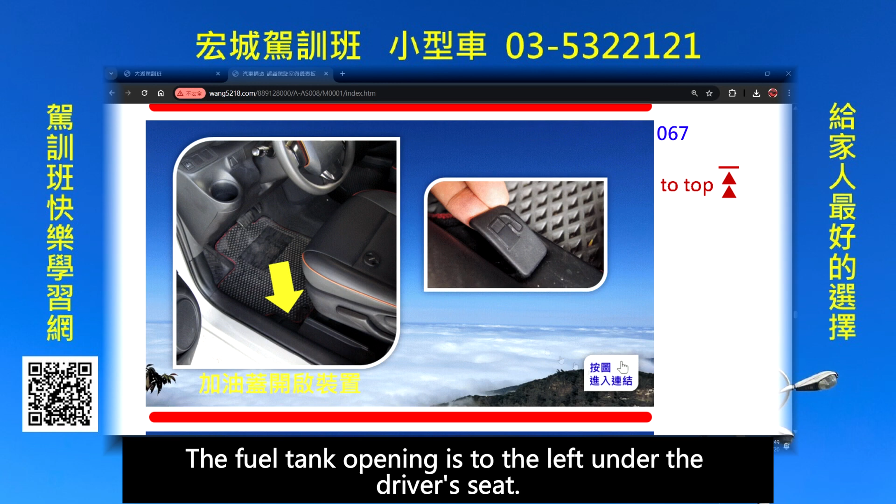The fuel tank opening is to the left under the driver's seat.

There are 3 buttons here. The leftmost one shows trip info and fuel consumption, along with outdoor temperature. The 2 on the right adjust the settings. The rightmost one is for adjusting the light angle.

The switch for the outside rearview mirror and windows. The power window switch for the car door, designed next to our left door.

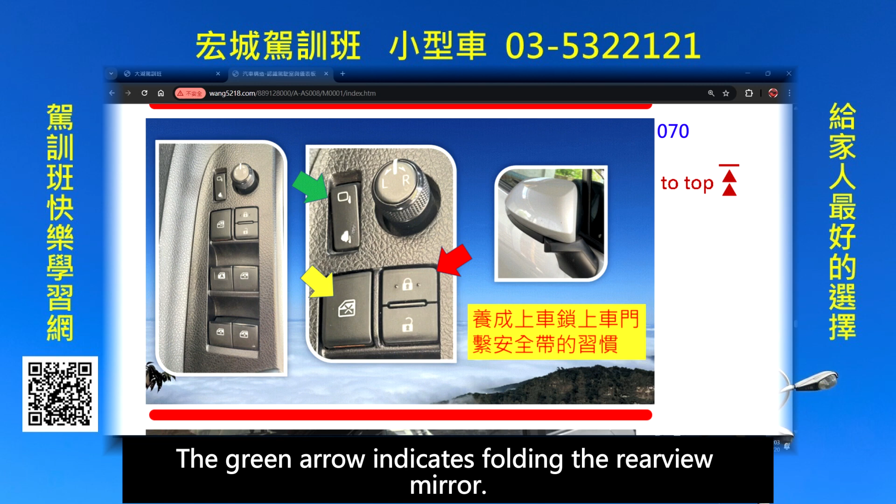The green arrow indicates folding the rear view mirror. The yellow arrow indicates this button, which prevents them from adjusting themselves. The red arrow indicates the central locking. Pressing this button will lock all 4 doors, and pressing below will unlock them.

When driving, lock all 4 doors, because it's safer that way.

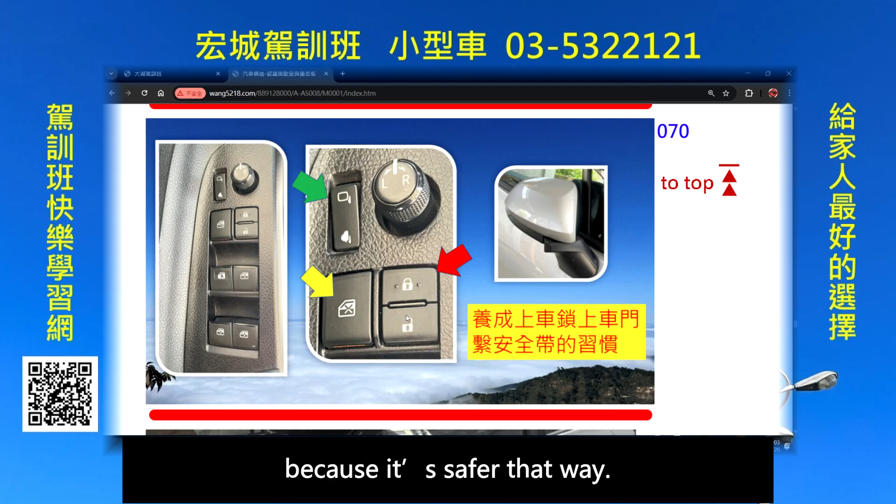Folding the side mirrors, a reminder to all students: if your car has power mirrors, you should fold them up when parking so they won't get damaged if bumped. These are the adjustments for both side mirrors. Adjust it left or right first, then adjust up and down, left and right.

Left and right sides of the rearview mirrors have been discussed in previous videos. However, what we need to talk about here is the middle rearview mirror adjustment, because by design, its angle differs in daylight.

Let's take a look at why the angle differs during the day versus night. In the evening, press it downwards so the light's rays are refracted. During the day, move it upwards so you can see the cars behind clearly. At night it will be very bright, so we need to angle this mirror downwards. In other words, the angles are different for day and night.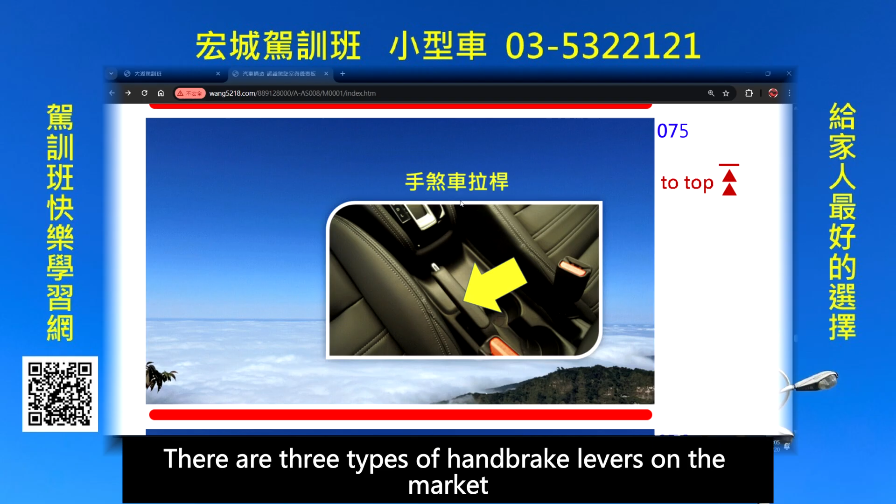Now the handbrake lever. There are 3 types on the market. The most common in family cars is the manual pull-up type, which we generally see most often. There are also pedal types, and another type is the electromagnetic valve type. Their design is to stop the rear wheels, as a safety feature to prevent the vehicle from moving after parking.

Drivers should develop the habit of pulling the handbrake tight before getting out of the car. When starting off, make sure to check if the handbrake has released.

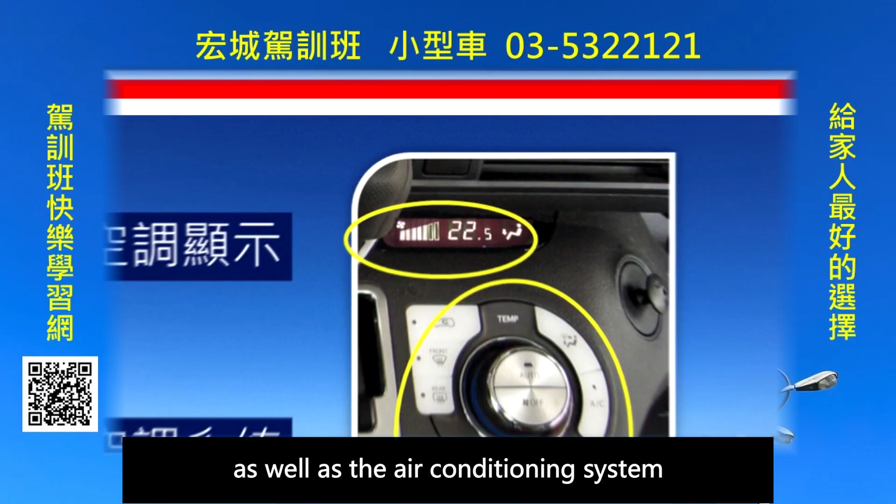Let's take a look at the air conditioning display and system. This top part shows the interior temperature. The bottom part is for adjusting the air volume, and to adjust the temperature, you can do it here.

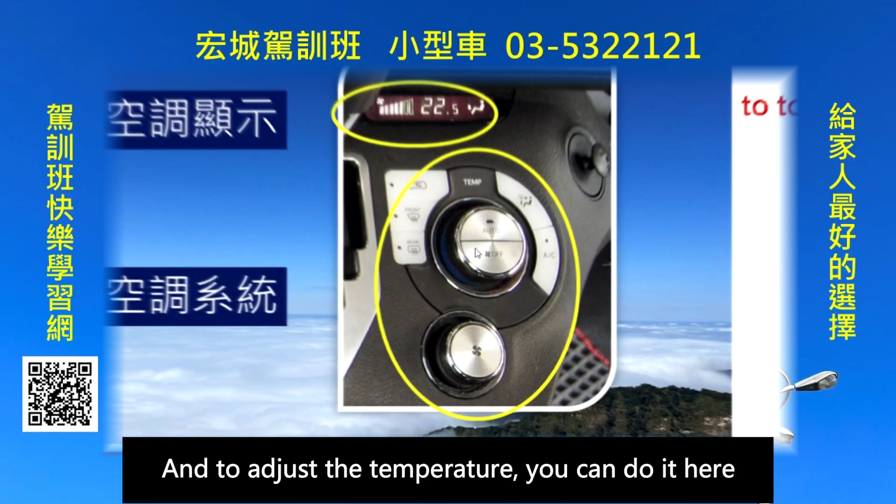The air conditioning system operates in automatic mode. Press the auto button to turn it on, and press off to turn it off. It's pretty simple to operate. For adjusting the temperature, turning clockwise increases it, while turning counterclockwise decreases it.

This is the airflow volume control, which works just like an electric fan. Turning clockwise increases the fan speed, while turning counterclockwise decreases the fan speed.

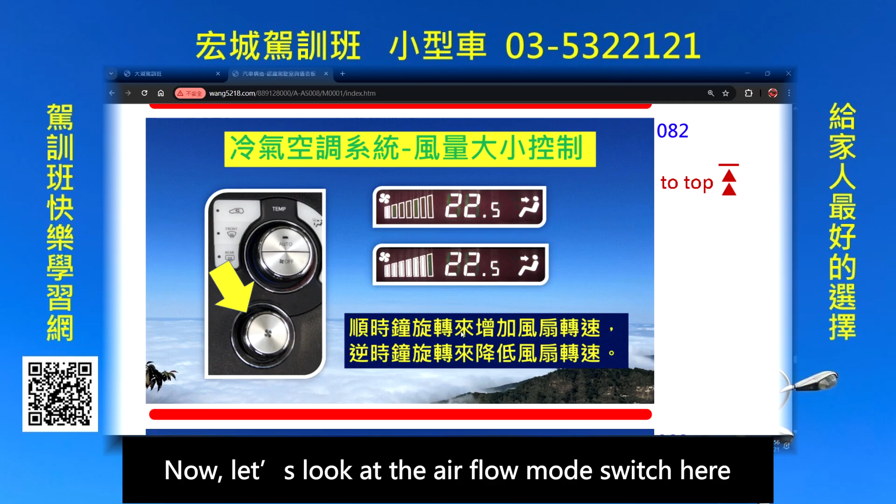Now let's look at the airflow mode switch. It has 4 modes. The first blows air to the upper body. The second blows air to the upper body and legs. The third blows air to the legs only. The fourth blows air to the legs and defogs the windshield.

If you press it again, it will cycle continuously through modes 1, 2, 3, 4, just like that.

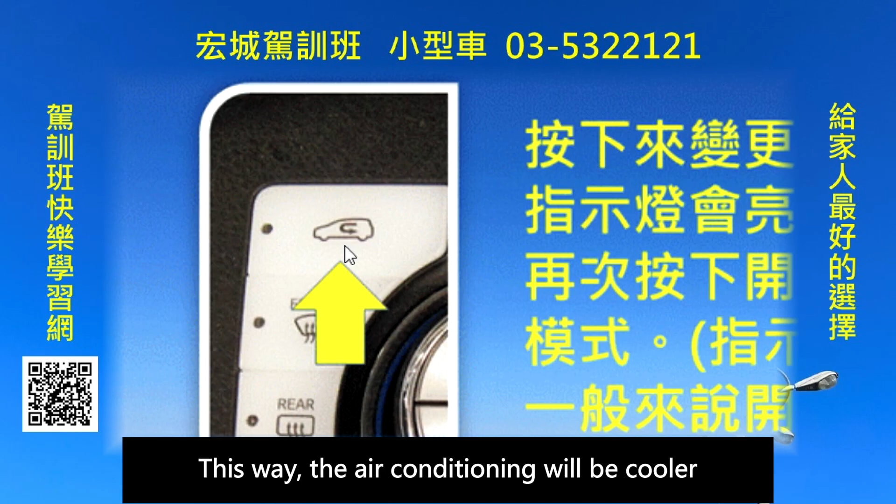This switches between outside air and interior air circulation. This system allows you to circulate the air inside. After pressing the button, since you're using the air conditioning, you don't want outside air to come in, which makes the air conditioning cooler. If you turn it off, outside air will come in.

Consequently, the air won't be able to defog the windshield effectively. The defogger is used to remove fog from the windshield and front windows, while another function removes fog from the rear window. The defogger will turn off automatically.

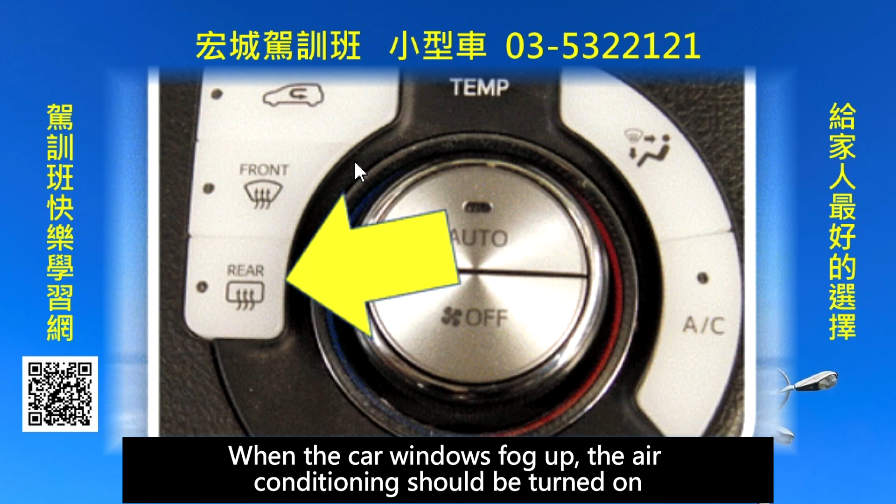After operating for a while, when the car windows fog up, the air conditioning should be turned on. If the moisture inside the car is high, the windows are more likely to fog up, which affects driving safety. So press the AC switch, which can effectively clear fog from the windshield. If it's turned off, the windows may fog up easily.

If using the interior air circulation mode, the windows are more likely to fog up. This is a reminder for us, also referring to the air conditioning. You need to press the AC switch to get cool air, otherwise there will be only airflow with no cooling. The air conditioning layout varies by manufacturer, but the symbols are the same.

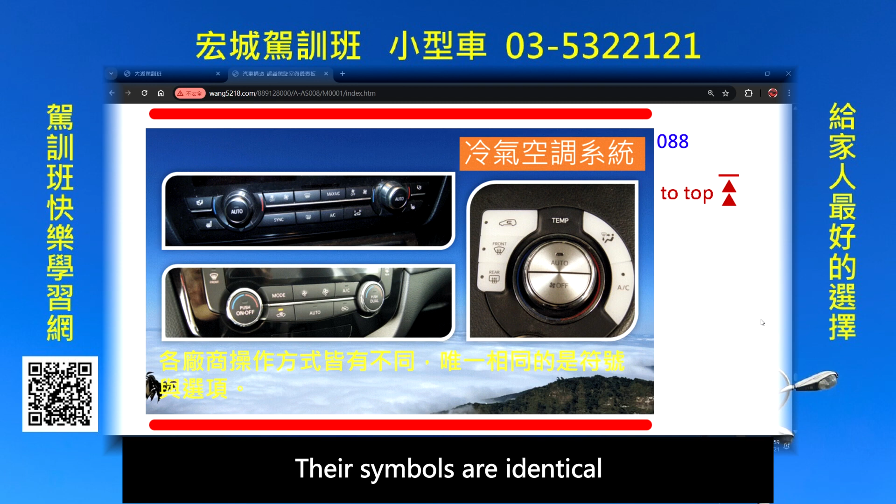Their symbols are identical. Now, the child safety lock. What is a child safety lock? It means that when kids are sitting in the back seat, they cannot open the car doors, as a safety design, because kids might play around and press random buttons. So when out with kids, the back seat must have the child safety lock engaged, so they won't be able to open the doors.

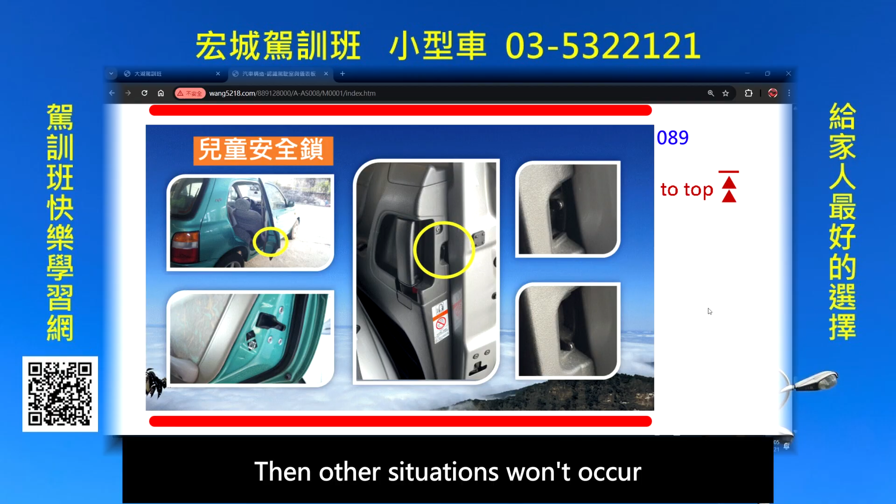The same goes for the windows. Inside the car, we can use our control system so kids can't open the doors or windows. Locking this prevents children from pressing buttons randomly, so other situations won't occur. This is the activation and deactivation of the safety lock. Once set, you can't open the door from the inside, but you can still open it from the outside. This is something to remind everyone of.

At the end of the video, we'd like to ask a question. While the vehicle is in motion, on the dashboard, which of the following items will not display a fault warning? 1. Turn signal. 2. Brake lights. 3. Headlights. 4. High beams. 5. Taillights. 6. All of the above.

Today we discussed the basic model of the dashboard. Of course, different vehicles will have different warning lights displayed. Hope everyone gained something from this. So let's wrap up our lesson.